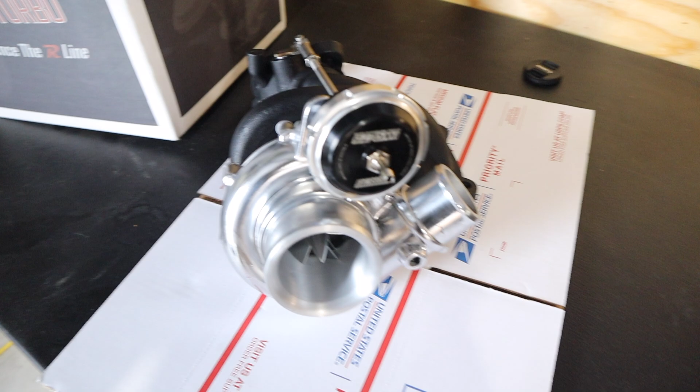This is a comp turbo - I don't know what's the actual legit name. It's like a CTR, it says right there. CTRX. I don't know, the paperwork's inside. Yeah, 5858 triple ceramic ball bearing turbo. Yeah, what he said. So yeah, it's pretty sick.

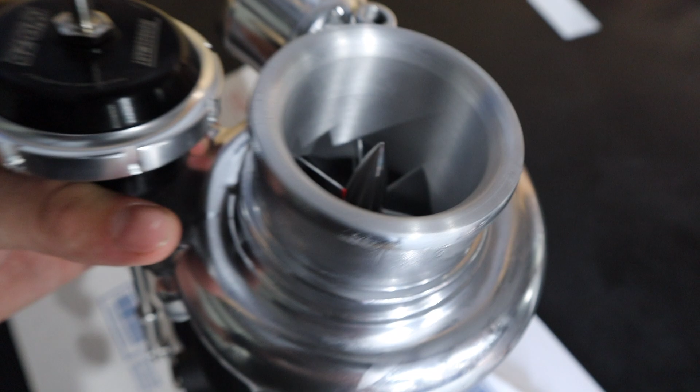My favorite part is the bullet. I don't know why I love that so much, but you have it on your comp, and I think it's on all comps. Yeah, I think it's just the coolest looking thing ever. It's like a bullet. But anyways...

This is the turbo that's going on my car, and I'm pretty excited about it. It's a 5858, and we're gonna see how much it makes, because this is a drop-in style turbo like the NX2, and it should bolt right on and be able to make some power. But it's bigger than the NX2. So I'm excited to try it out and test it on my car, dyno tune it, run it at the track and see what it does.

So we're gonna be installing that, and we'll take you guys through the process.

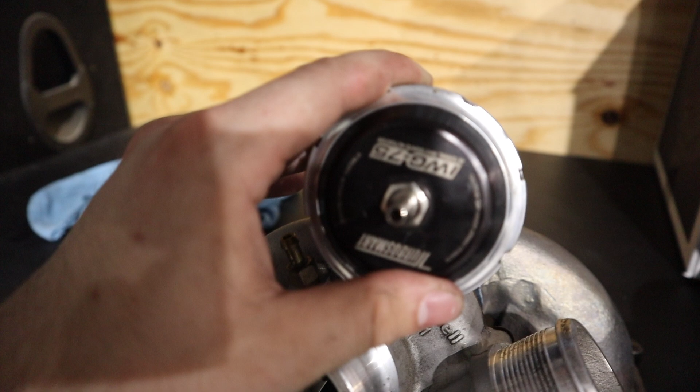All right guys, so I've been hard at work and I got the turbo off. Here's the stock turbo, nothing special, got my wastegate actuator. Here's the comp, and there's the two next to each other. That looks like a pretty big difference - it goes from about 2 fingers to about 4 you can fit in there. Yeah, it's a pretty big difference.

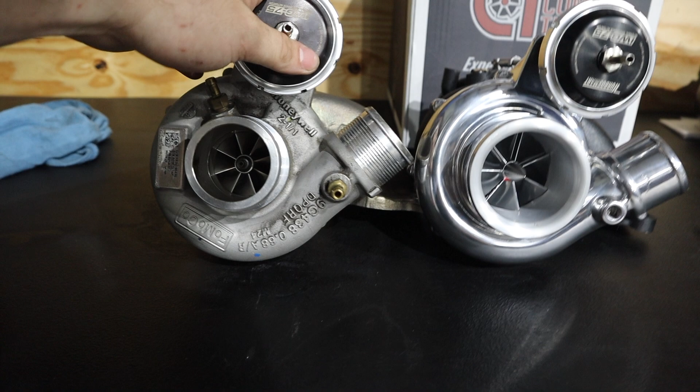So I had to switch over the port, take that one, put it over there, and then we'll get the turbo in the car, start hooking up all the lines, and get everything going. I'll keep you guys updated as I go, but hopefully we'll get the turbo installed tonight, it's getting kind of late, or I'll do it tomorrow. We'll see, but either way, it's gonna be fast in the video, so we'll get this back on the car and going and get the rest of the stuff installed.

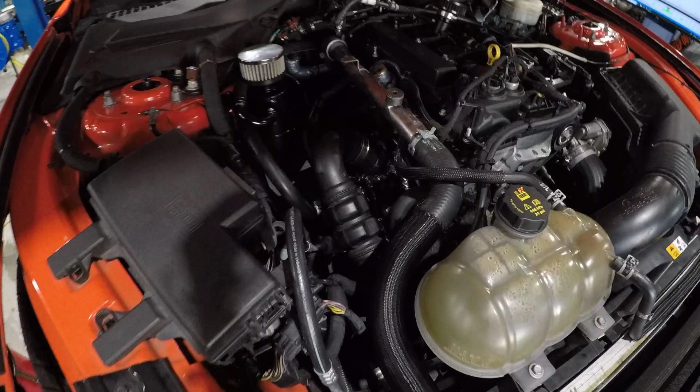So all right guys, we got the turbo installed. Didn't show much of it, but the car's on the dyno now, and the turbo's sitting in there looking all nice and pretty. You can't see much of it because it's tucked under everything, but it is in there, and that's the comp 5858. Got it on the dyno, 93 in the tank, it's on a base tune. We're gonna see what it makes, and we are gonna get it dialed in on 93 from here. So let's get to it.

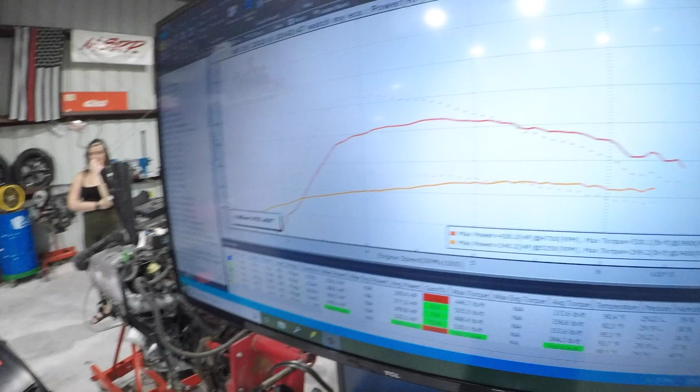All right guys, that was the first run, on the base file. We're talking low timing and 0 for wastegate duty cycle. The top is my E85 run on stock turbo, and bottom is literally 0 wastegate duty cycle with no timing on a base map on 93. It's super low, 240, 269, and felt pretty slow, but it's a base map. We're gonna get the logs over to Ryan and see if we can turn it up on 93.

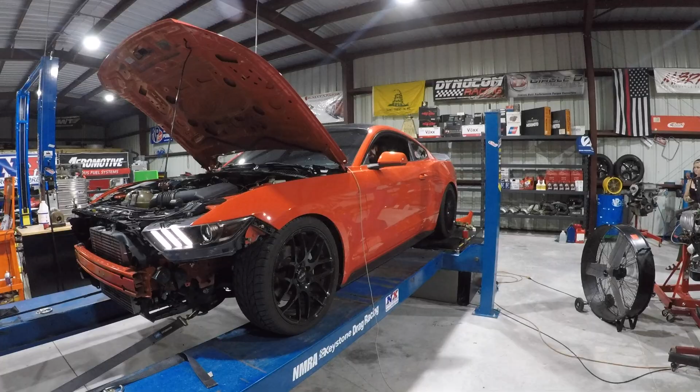All right, that's run 2, guys. Looks like he bumped it up a little bit, 265, 303, but we're gonna keep bumping it up, keep sending logs, and see where we go from there. Let's go send the log, and we'll get to run 3.

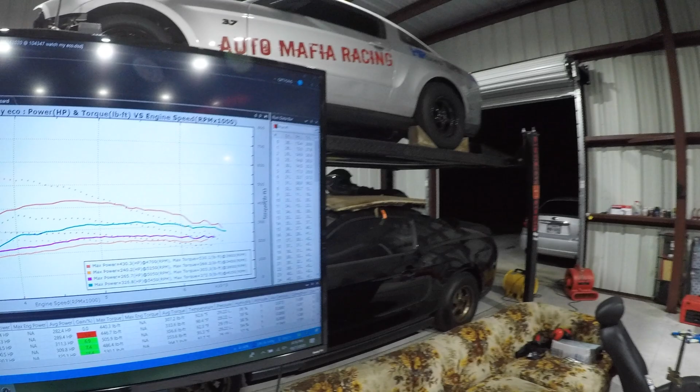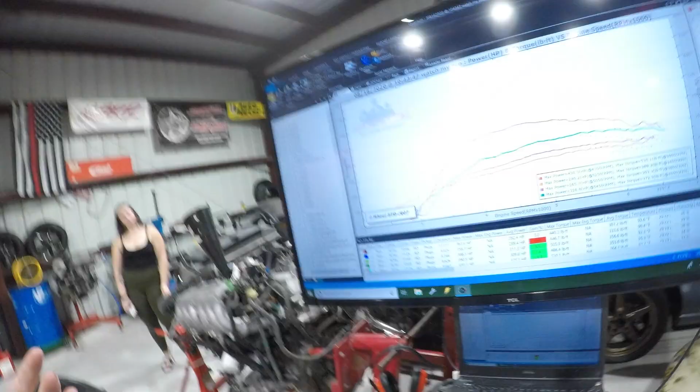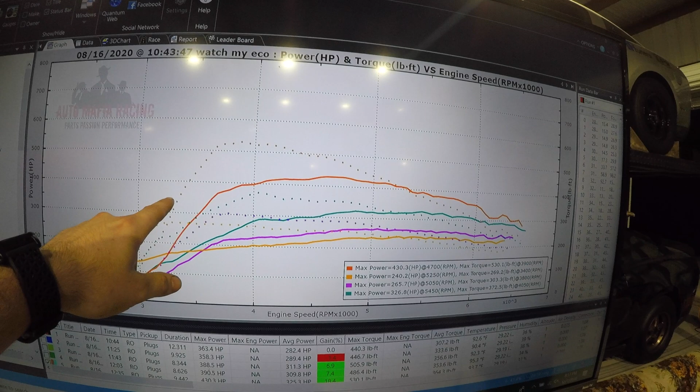How'd it feel? Better? Obviously. All right guys, that was run 3, and we bumped it up a little more boost. I think it's still low on timing, but as you can see, made 326, 372. We're just getting started, he's slowly bumping it up. If you look at it, we're the turquoise color, and it's staying flat the whole time, which is good, because on the stock turbo run it kind of just starts going downwards. Hopefully once we start making more power we can keep holding it all the way to redline like at these lower power levels. Send the data log over and get a new tune.

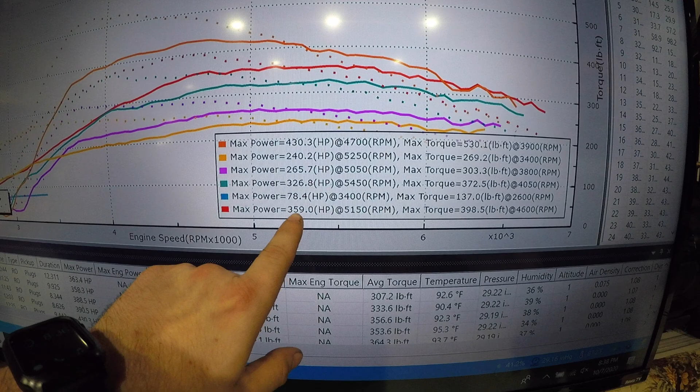Alright guys, that's run 4, and we added a little bit more boost. We're the red run, looking at 359, 398. Disregard that one, we had a slight charge pipe blow off, so I made 78 horsepower, but 360, 398, that's not too bad. Once again, send the data log, get a new tune, run it on the dyno, see what it does.

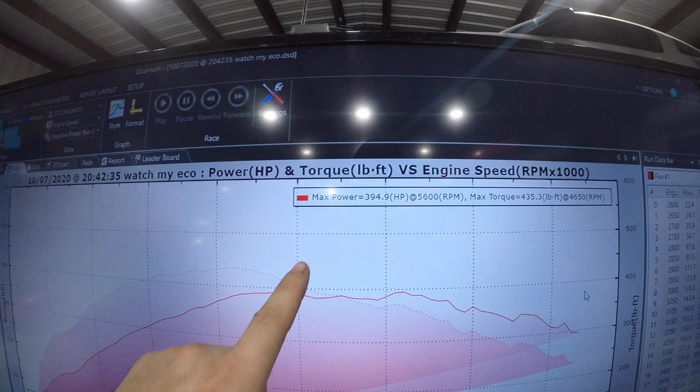Alright guys, that was like run 5 or something. So we turned it up a little bit more, and we're looking at 394, 435 on 93. We're gonna get that log over to him and see if we need to make any changes. That's not bad for 93, to be honest. We'll see what we have to do, or if we need any more revisions.

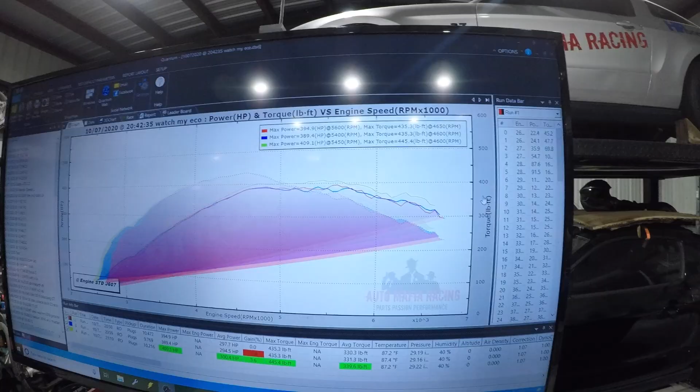Alright guys, so that run, we hit my personal goal of over 400 horsepower. We did 409 wheel horsepower, 445 wheel torque. Remember, this is on 93 pump gas, and I'm pretty happy with that because it's a drop-in turbo, on 93, making 409 to the wheels and almost 450 torque. The only thing to do now is get some E85, map sensor, and see what it'll do after that. We're gonna send the log to Ryan, that's probably gonna be it for the logs, but we'll see.

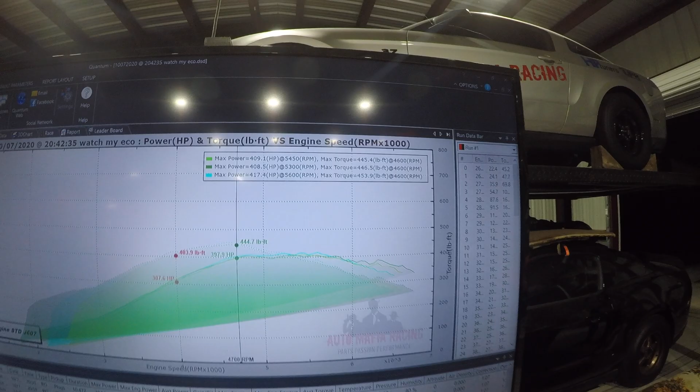Alright guys, that was the last run, and we happened to make a little bit more power. We thought the last one was going to be it, but Ryan did a couple things, and we ended up making 417, 453, so that's not bad. Like I said before, that's for 93 on the Comp 5858 turbo. I can't really complain about that. Next thing we need to do is get the car on E85 and see how far that'll take us. I think that'll take us quite a bit farther than it's at right now.